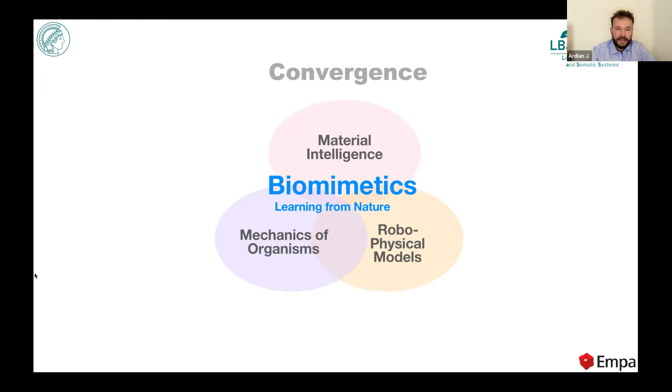In recent years, we have seen a convergence of material intelligence, biomechanics, and robophysical modeling, and this has enabled biomimetics in important ways.

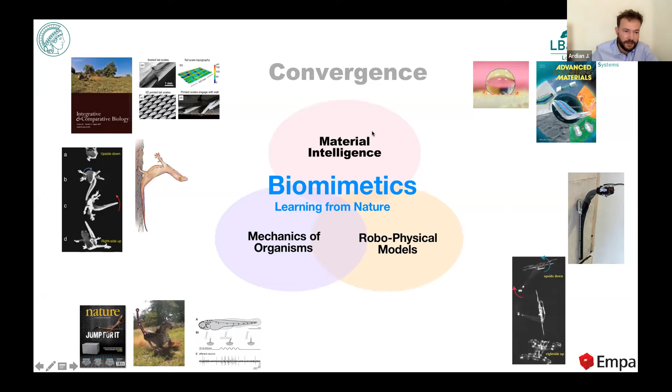Here are a few areas that my group has contributed to. Are you seeing the slides well? Are you just seeing the title slide? We're seeing the slides correctly, everything looks great.

The name of the session is Bio-Inspired Robotics, and I see two important approaches: one is biomimetics, as we're becoming accustomed to, and the other is robotics-inspired biology.

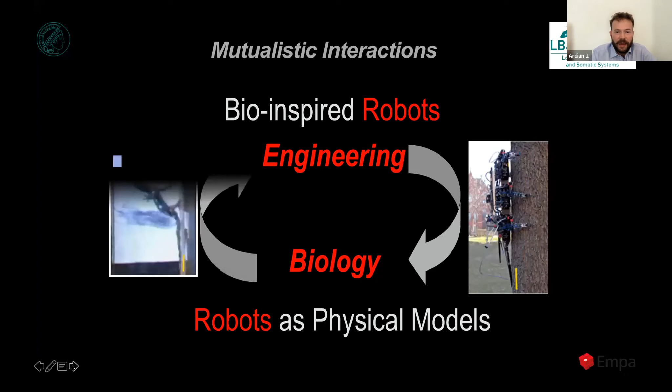My first experience in bio-inspired robotics came through a DARPA project starting in 2005. There we worked on climbing robots, and this led to a discovery in biology. This was a profound experience for me.

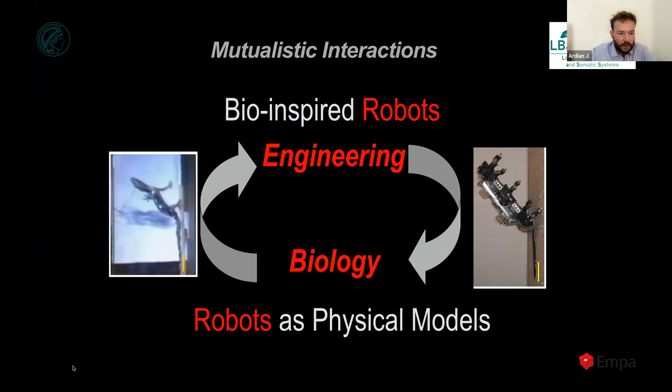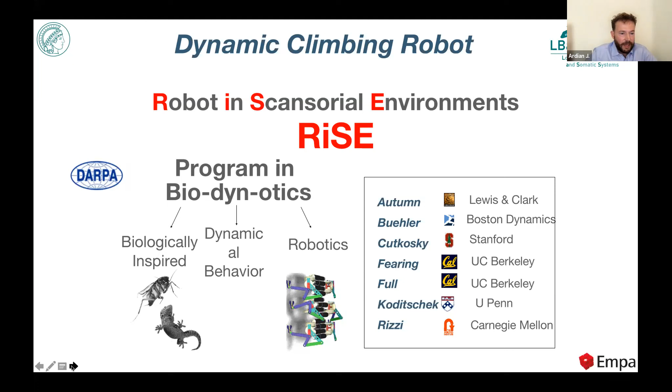I want to tell you about how robots can be powerful to make a discovery in another field. This was an amazing collaboration between seven partners, including Boston Dynamics, UPenn, Stanford, and Berkeley, and the goal was to build a multi-legged climbing robot.

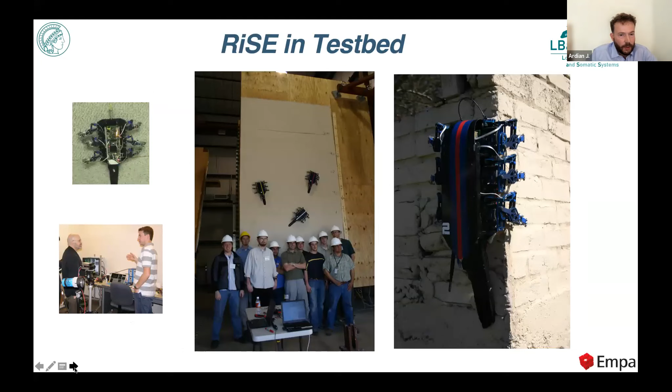First it was insect-inspired, a hexapod, but increasingly it was found that a tail was important for climbing. This led the roboticists to ask what is known about tail use in nature.

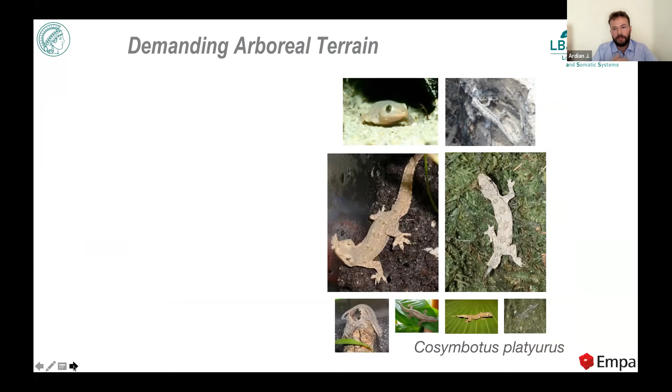I noticed in the poster session we had a lot of different tail posters. It was not always obvious that tails are actually useful in animal locomotion. Tails could have various uses - for communication, for fat storage, for many different functions that have nothing to do with locomotion.

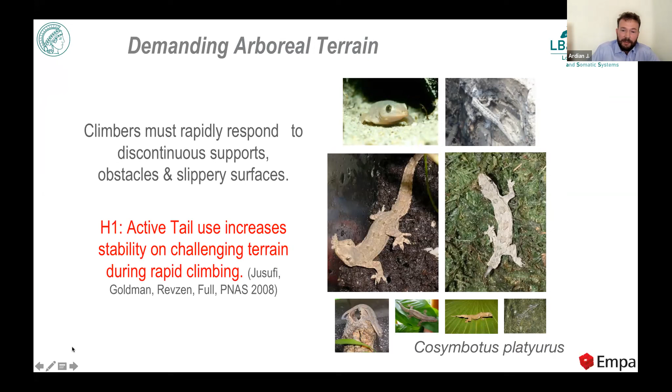Here we wanted to look at how geckos, nature's elite climbers, use their tails for highly dynamic wall running. We tested the hypothesis that a tail reflex could help, within 50 milliseconds, say, to reject perturbations during climbing at 30 hertz.

This is a gecko you see in real time going vertically, and we embedded a slippery patch where front foot traction was removed. You saw within 30 milliseconds they began to move the tail down incredibly fast.

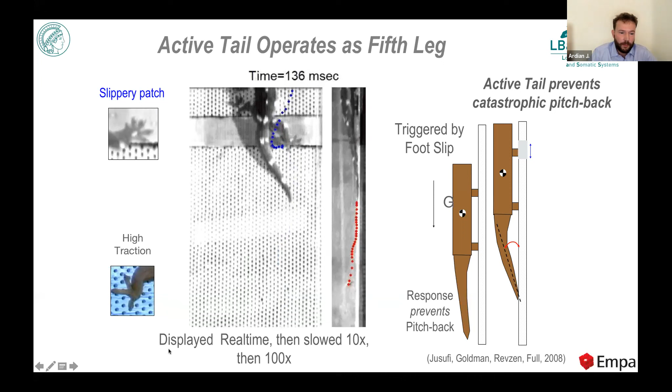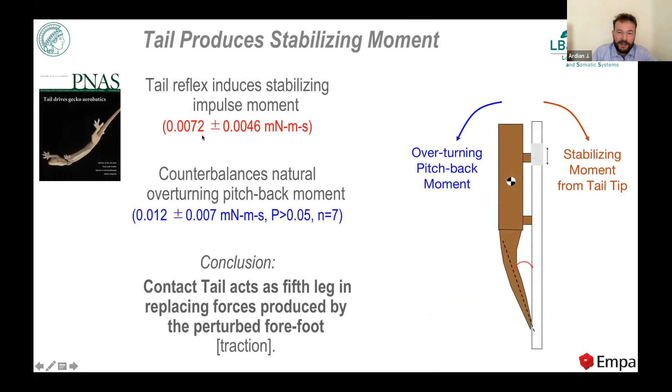We measured the wall reaction forces and found tailless animals fell more frequently. We found that the stabilizing impulse moment was actually matching what the front foot that is perturbed would normally generate. This led us to get back to RiSE and add an active tail.

The active tail helped with transitions from horizontal to vertical, and it also inspired a variety of other tail climbing robots, such as by Metin's group.

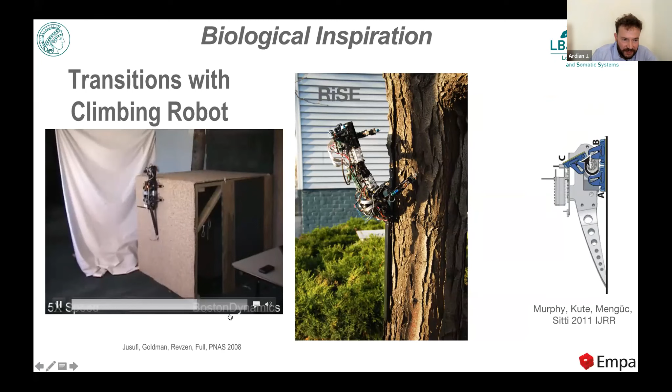However, if you look at the animal, its body is actually soft, right? It's made predominantly of water. And these biorobotic models had actually been rigid before, mostly.

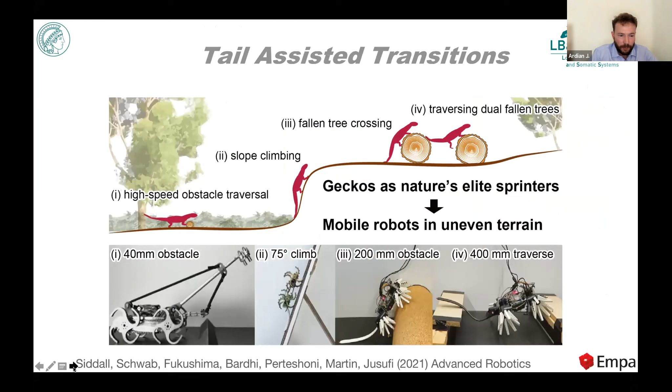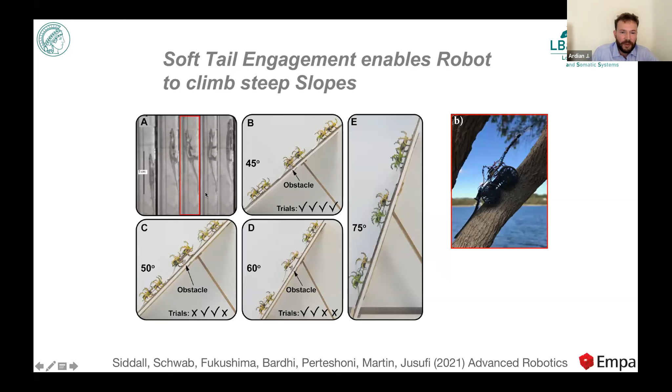Taking this further, more recently we studied more compliant tails. As you see here in A, the gecko is able to generate an edge load more than a point load.

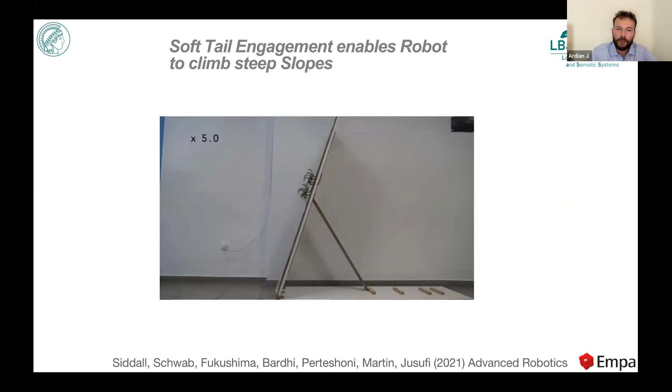We started working with more compliant tails. I'll skip here to the climbing test. In this very simple wedge-based climbing robot, you see we have a compliant tail, and it can actually help with obstacle traversal in different situations, but you would need to be able to have a stiffness control.

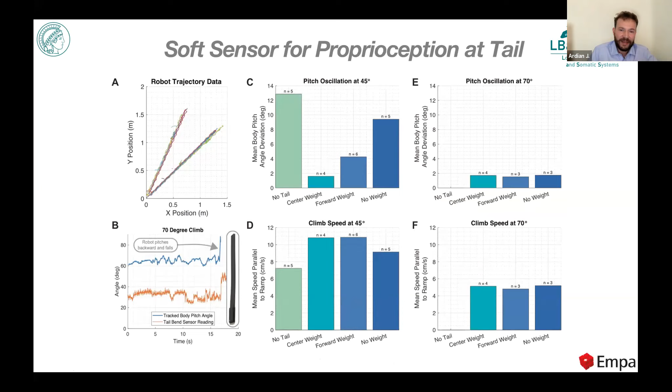That's what we're working on most recently. Here we have also added a soft sensor, and it can give us proprioceptive information of this fifth appendage. We think of gecko locomotion more as pentapedal now, as opposed to quadrupedal.

If you traverse two gaps, one after the other, a rigid tail could actually get in the way and inhibit locomotion. A compliant tail can be helpful as you traverse multiple hurdles. This is how we've expanded the study on compliant tails, trying four different stiffnesses here in this fin ray-shaped legged robot.

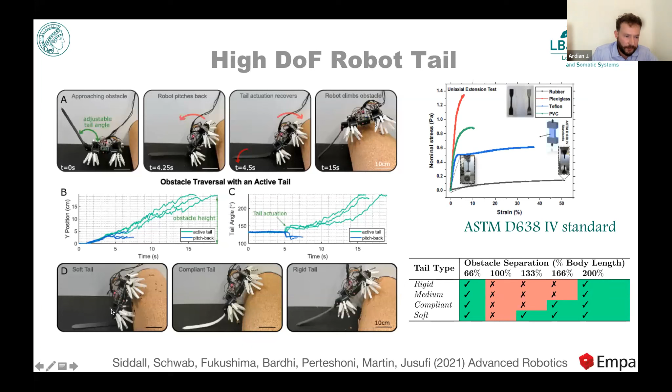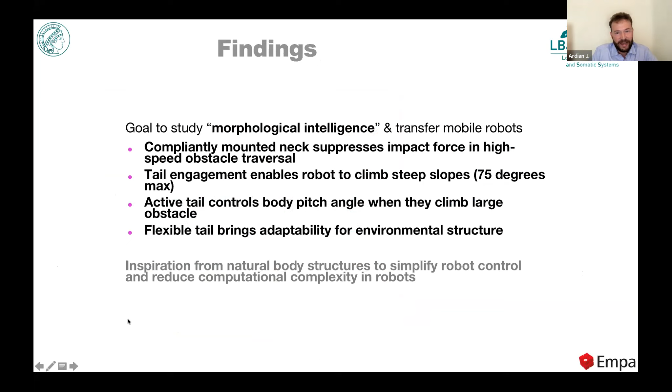In this study, we basically looked at the advantages of a flexible tail. We also looked at compliance in the neck, a heads or tails study which I don't have time to cover here. But just to give you a taste, the goal of this research is a biorobotics approach, as you may know from Professor Auke Ijspeert or from Li Wen.

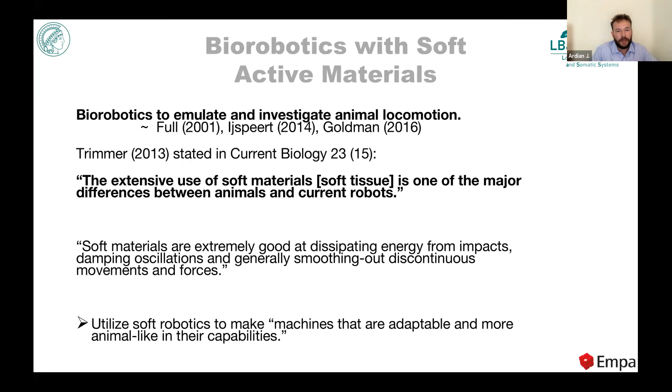We use biorobotics to emulate and investigate animal locomotion before we transfer it to robotics. Of course, soft materials are the greatest difference between conventional robots and animals, and we think it's key to agility to incorporate material advances as they become available. To this end, we have been using soft sensors, in collaboration with Yong-Lae Park, who spoke this morning. We hope this approach will help achieve more lifelike movement.

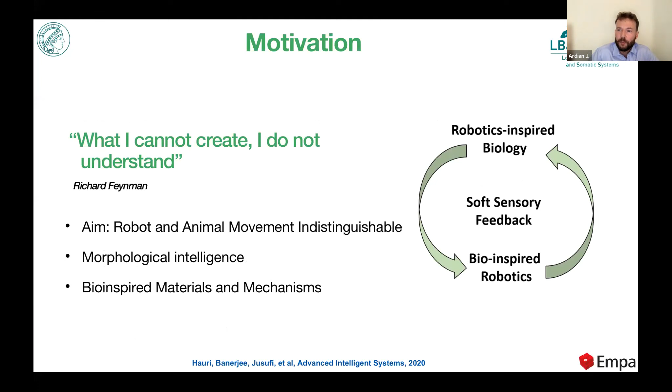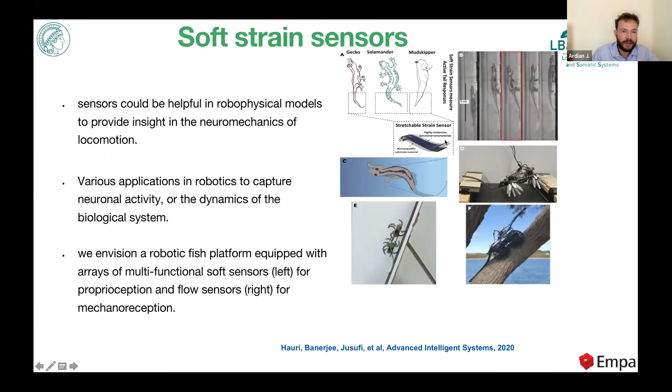We have been using soft strain sensors not only in climbing but also in swimming, which I hope to get to towards the end of the talk. But first, I want to speak about arboreal locomotion and climbing. Any robot that climbs up has to eventually come down or have a plan for reorientation.

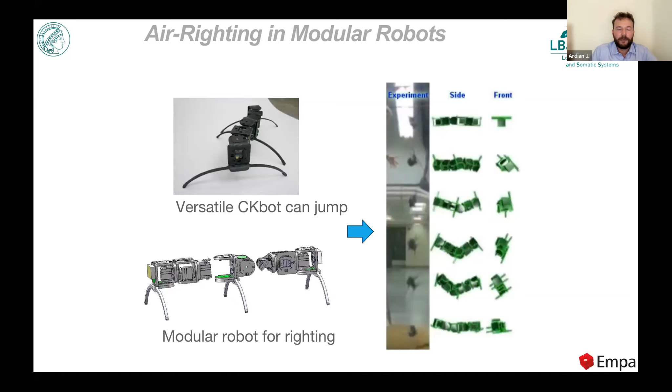Coming from UPenn, we had CKbot, a modular robot that rights itself like the falling cat. What we found is that the gecko does it very differently from the falling cat, which uses mostly bending of the back. The gecko, when it comes from upside down to right side up, uses a swing of its tail in one direction to cause a reorientation of the body in the other. This is the fastest righting behavior yet observed.

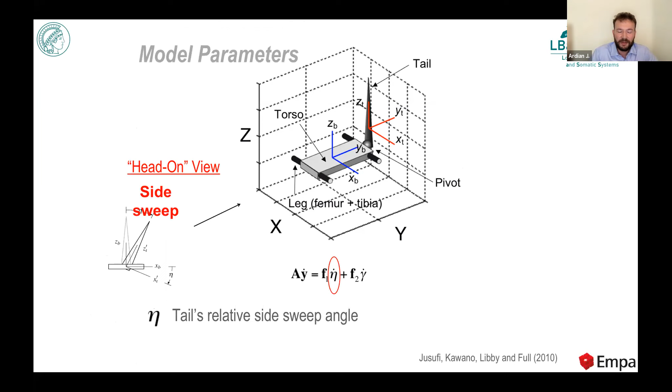Angular momentum is conserved in roll as it falls. We studied this carefully with tailed and tailless experiments, which is important in biomechanics. We built a 3D dynamic model and confirmed that inertia was sufficient to explain the righting behavior of the gecko.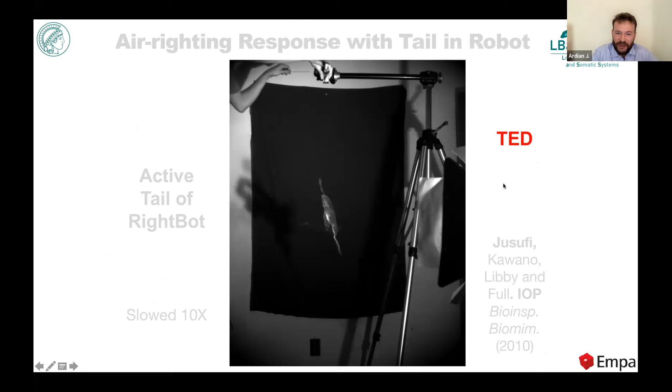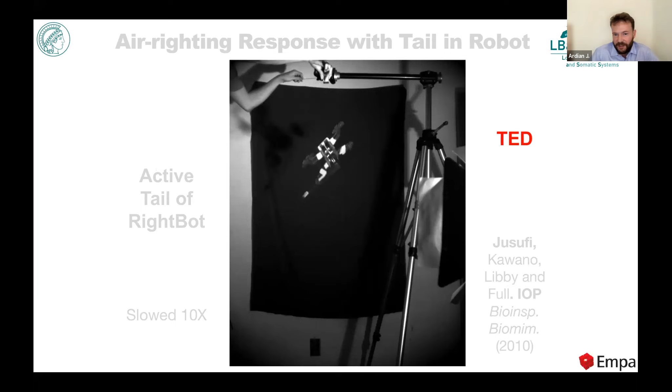This inspired the righting response of RightBot, which was presented in a TED Talk. It was able to use a simple spring released through a thread to reorient itself. So we can do body attitude control, changing orientation of the body by using tail inertia, which in lizards is 10% of body mass.

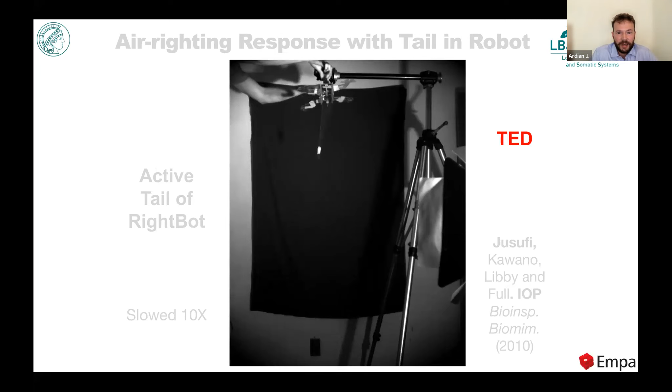And this doesn't only help in free fall. Free fall, of course, is a great experiment because no external forces are acting on the system except gravity. So we wondered, how is that for rapid running?

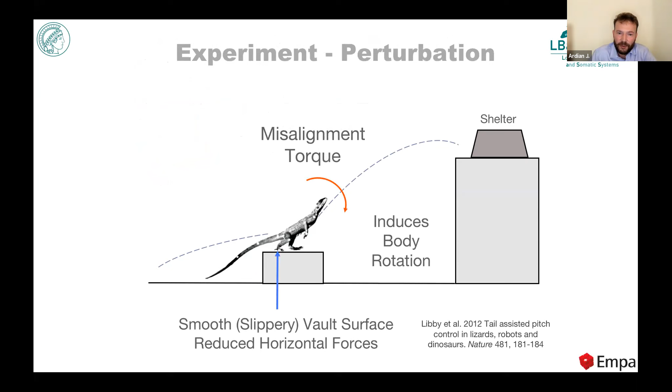In this study, we tested vaulting or hurdle traversal of a sub-Saharan lizard. We have two control experiments: one with good traction, where it can use the ground reaction force vector going through the center of mass to control flight and vaulting, and one as it slips. When the lizard slips on this box, it pitches its tail up, allowing it to maintain heading.

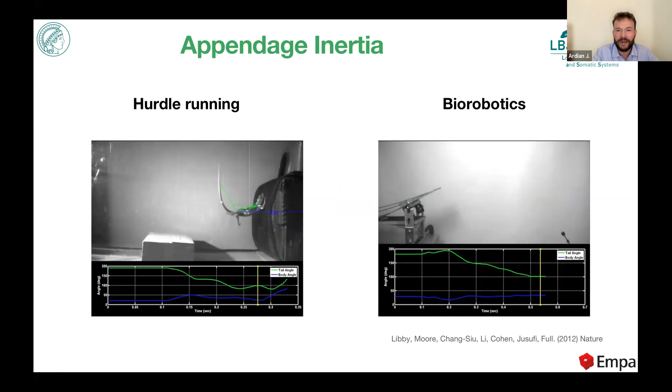We tested this with a robotic model, a very simple robot. We drive off a ramp to get a misalignment torque, and we temporarily redirect angular momentum from the body to the tail to maintain heading.

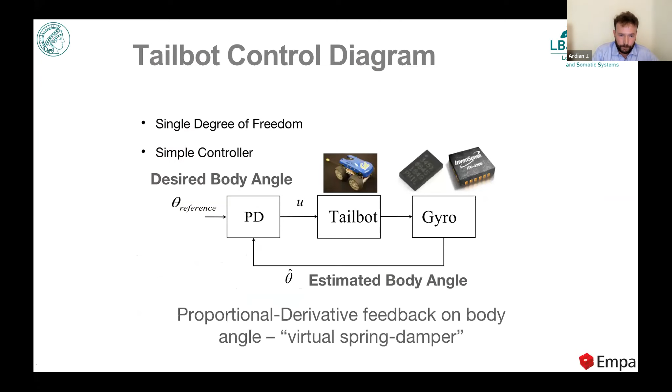In the interest of time, I'll skip the details here. This is a simple robot with PD control. But interestingly, you're all familiar with Mark Rober, right?

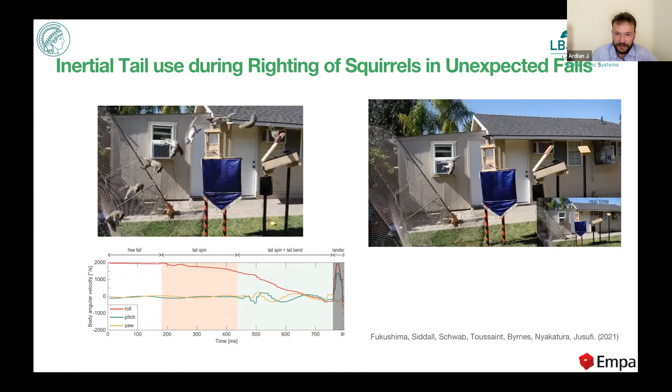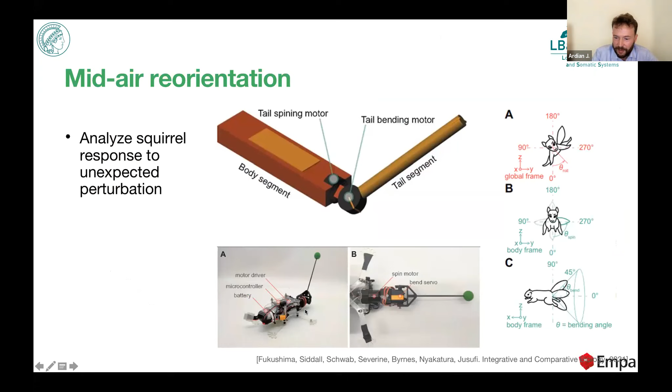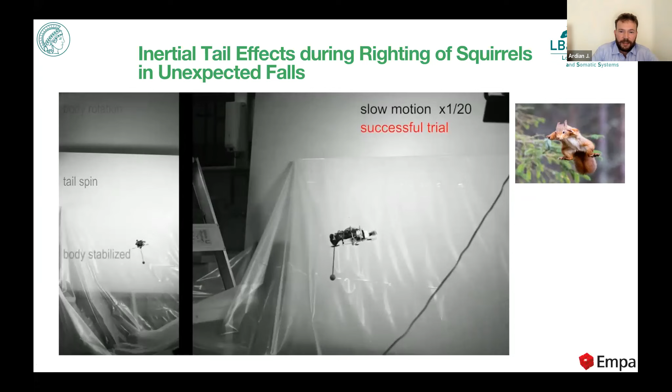He perturbs squirrels with a feeder and a spring system where they get catapulted into an undesired body orientation. We studied the kinematics of how they rotate their tails to land on their paws, and we also built a robot to explore this further. In this squirrel robot, you can see we have a bend servo, a microcontroller, battery, and IMU. As this robot is perturbed in the same fashion as the squirrel, you see on the left side that the tail rotates to arrest this undesired rotation of the body in roll.

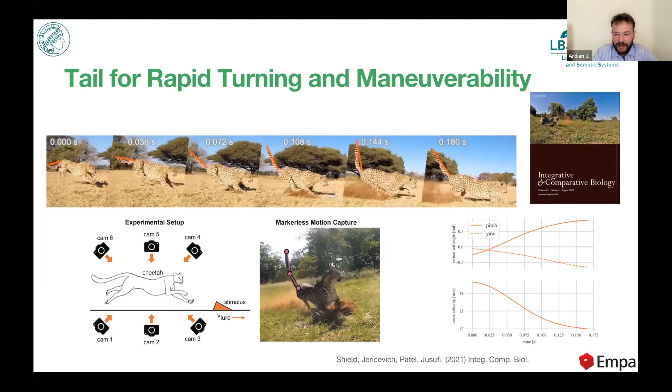We work with Amir Patel of the African Robotics Unit on tail use in cheetahs. We have a nice review paper on this if you'd like to take a look. What Amir has found is that cheetahs could also use the aerodynamic aspect of the tail, so drag torque of these cheetah tails, as opposed to predominantly inertia.

In free fall, inertia predominates in the geckos. However, what I've studied is also their gliding behavior in the wind tunnel. Here you see a gecko filmed from the top down in a vertical wind tunnel, where essentially the aerodynamic forces balance the forces of gravity, so we have equilibrium gliding.

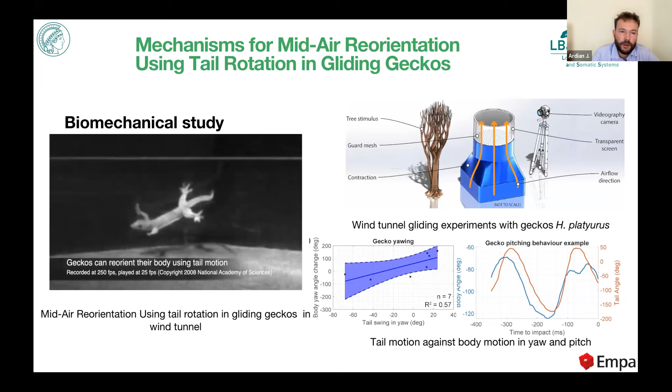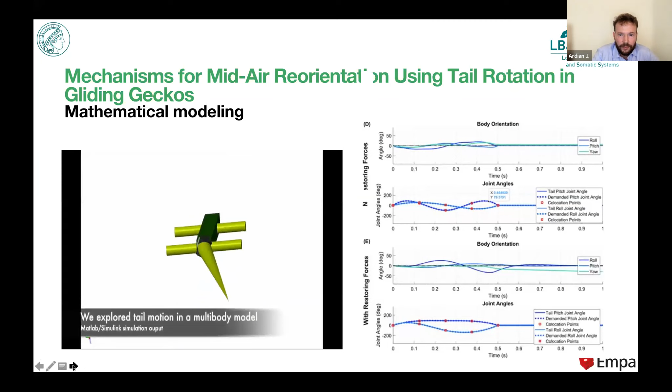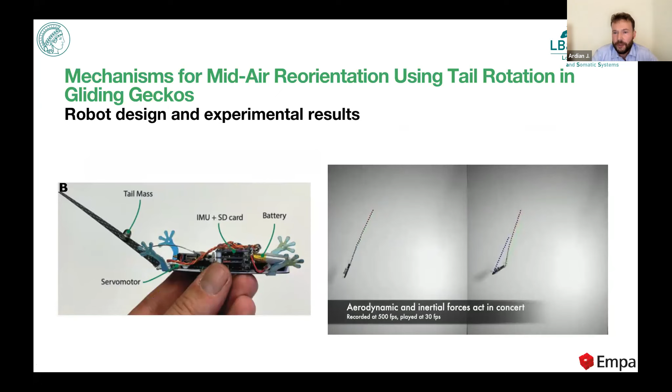So to find out whether these animals are able to land after gliding and glide in the rainforest at all, we went to Southeast Asia. In the wildlife reserves of Singapore, I was able to film how they alight on a vertical tree trunk, and we found an incredible behavior. As you see there, they are able to pitch back 120 degrees from the vertical, and they use their tails for this fall arresting response.

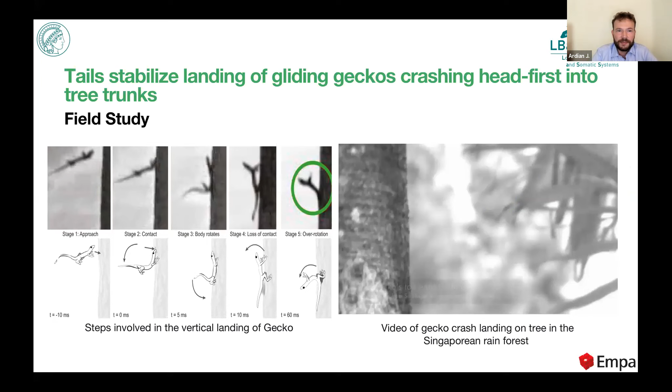So we then built a robot, a soft robotic physical model of this gecko, to study the landing dynamics. Using a catapult, we were able to launch the robot at a force plate, and we measured the forces on the rear foot required to land effectively.

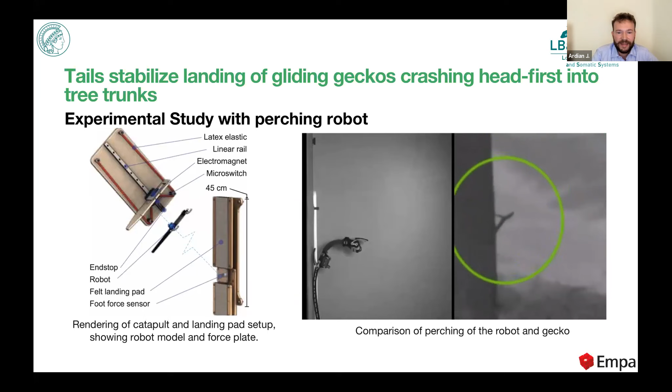You can see here that the tailless landing performance was dramatically reduced in the robot. This was also found for some tailless geckos that landed. So the soft back is very important in this behavior - it is actually printed on the Carbon M2.

As the robot approaches, we have a proximity sensor, and we are able to activate also an active tail response. If you look at the bottom plot, this effectively shows peak foot force as a function of relative tail length. So why would tailless robots fall more frequently?

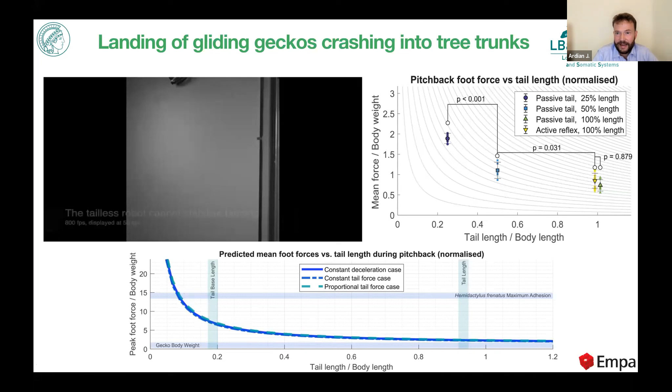Well, it's because forces required at the rear leg during the fall arresting response are inversely proportional to length of tail. So if you look at the maximum adhesion force of this gecko, modeling would suggest that the forces at the foot required to remain attached would be greater than the leg attachment maximum force.

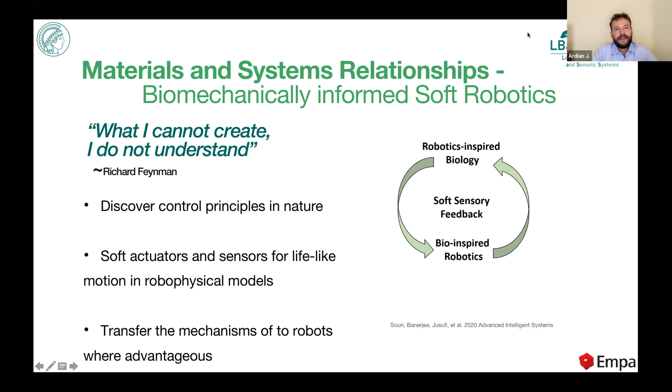Richard Feynman, the famous physicist, said, 'What I cannot create, I do not understand.' In biorobotics and bio-inspired robotics with conventional materials, we have not quite been able to close the gap between agility and robustness in animal locomotion. I hope that with new approaches coming from soft actuators and soft sensors, we would be better able to understand these systems relationships.

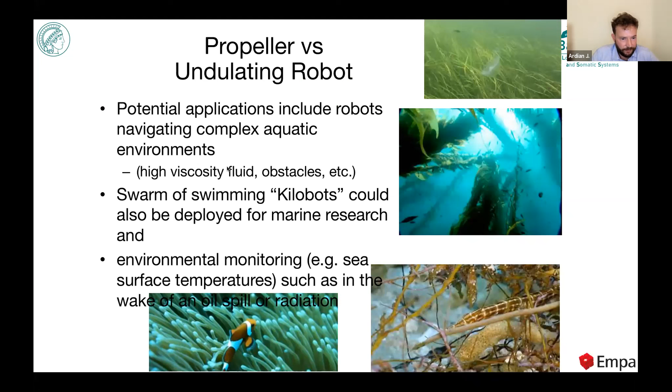So to this end of achieving active stiffness control with soft robotic tails, we explore the body caudal fin swimming of fishes. There have been many swimming robots, including of course Marchese and all. We have Suzumori, who had the first swimming robot that I know of. We have Rob Shepherd, of course, with the embodied energy aspect.

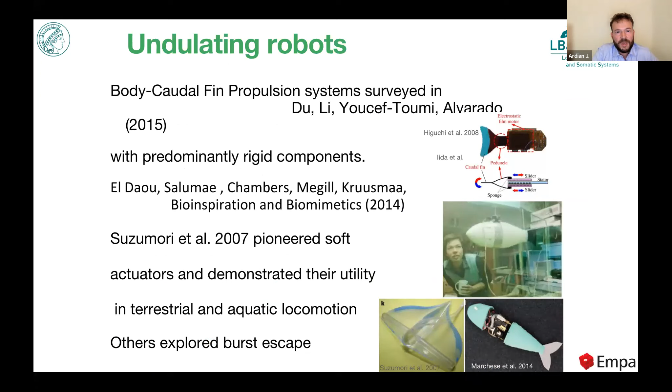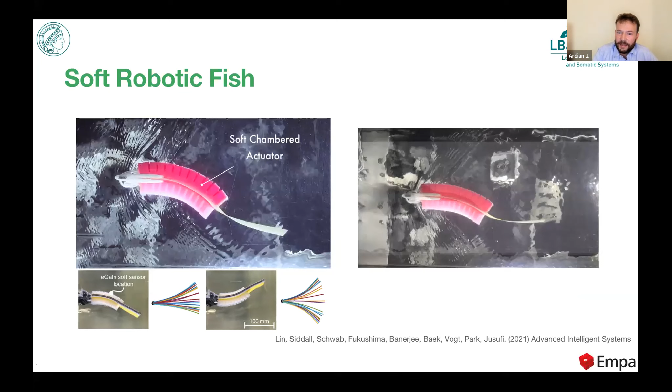Our interest was in exploring how stiffness control could affect swimming performance. To measure swimming performance, we attached our physical model to a force torque sensor and measured instantaneous thrust. Of course you would all know the dead trout video, where if it swims in a von Kármán vortex street, it's able to effectively have propulsion without muscle activation. So if you could do hydrodynamic tuning, it would be much more efficient, and this is what we set out to explore.

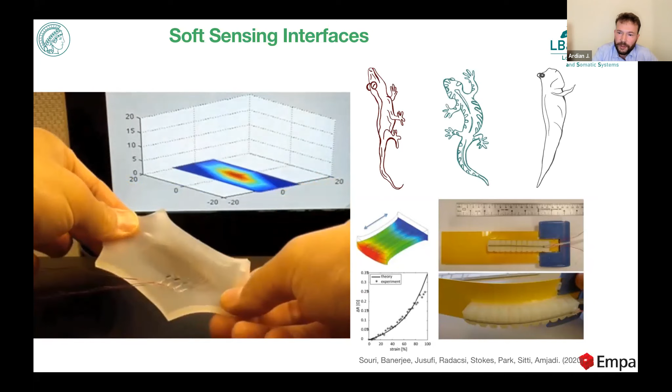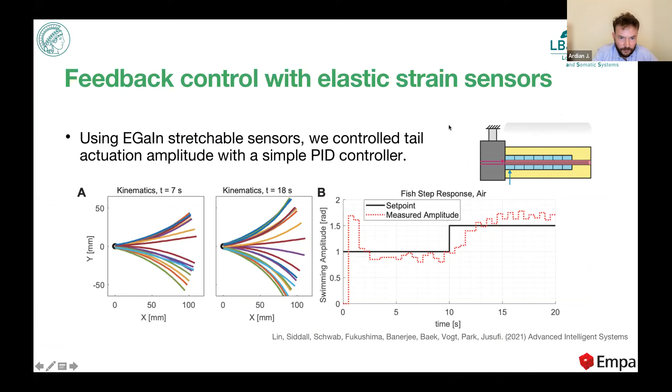We also used soft sensors, working with Yong-Lae Park, to effectively close the loop in swimming. In our latest work, we were able to control tail amplitude with a simple PID controller. We have also done a PIV. So what you see there is the soft robotic fish swimming in a flow tank, and you see the soft sensors and actuators on top.

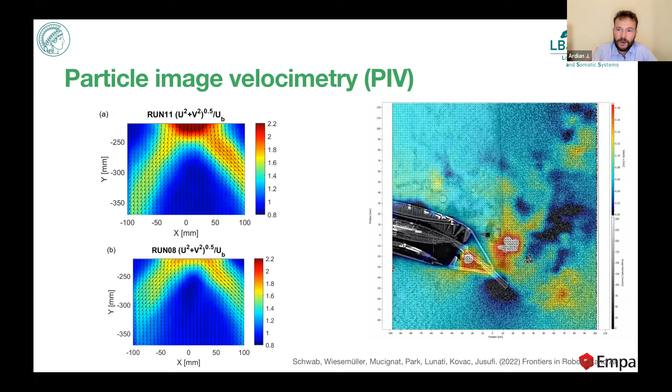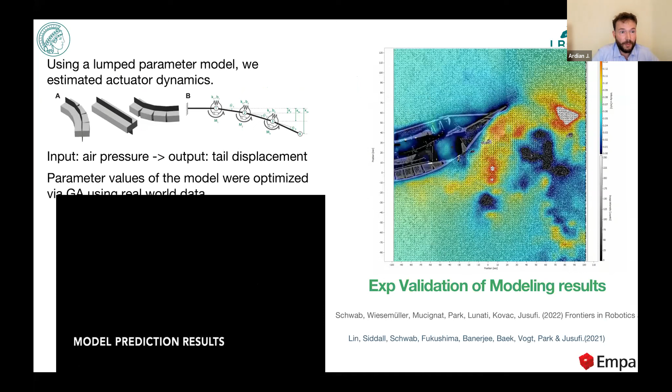What we found is that some stiffening and bilateral co-contraction resulted in the peak thrust, as was hypothesized in the fish swimming literature. We also used a lumped parameter model to estimate actuator dynamics. Our input is air pressure, the output is tail displacement, and the parameter values of the model were optimized with this genetic algorithm using real world data.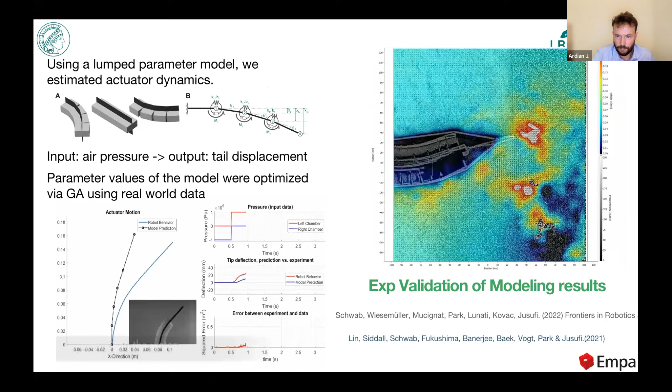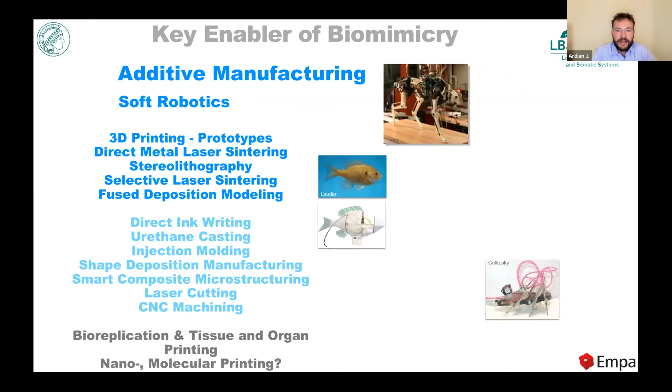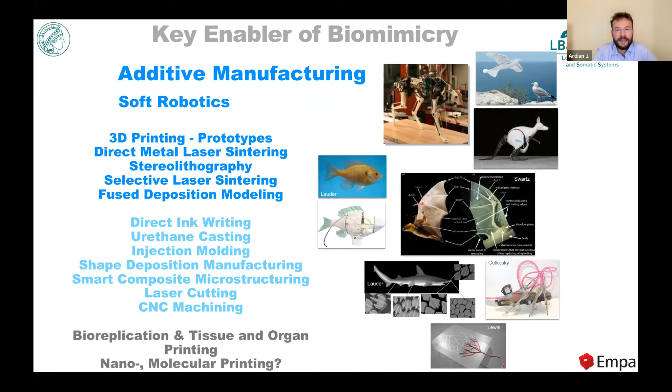So to sum up, we find that a key enabler of biomimicry is soft active materials, in terms of sensors and fluidic actuators, but also additive manufacturing. This has allowed for very interesting new physical models for biomechanists to test hypotheses of neuromechanics. Equipped with these new technologies, we can do more robotics-inspired biology to better understand the morphological computation we find in nature, and it enables physical model-based experimental validation.